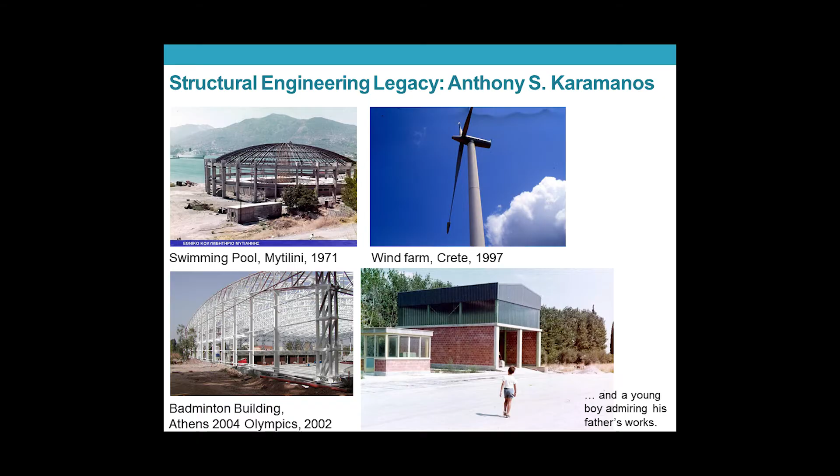I attended a French school, and that was important for me, not only to learn the French language, but also to get acquainted with the French culture. And that is very important for my future steps and my general background.

After a few years, the first one became prime minister, the other one became president of the republic. But apart from this milestone, I think it's important for my professional career because it gave me a lot of confidence in my future steps. So I entered the university, the National Technical University of Athens, and graduated in 1989. And after that, it was the big step to go to the United States for my graduate studies.

So Austin, Texas, was the university that I chose. It was a very exciting time for the offshore industry. And being in Texas, there are many chances that you get something in your graduate studies related to the offshore industry. The offshore industry at that time wanted to expand to deep water applications, and one of the problems was the integrity, the structural integrity of pipelines to be installed in depths that exceeded 1,500 meters.

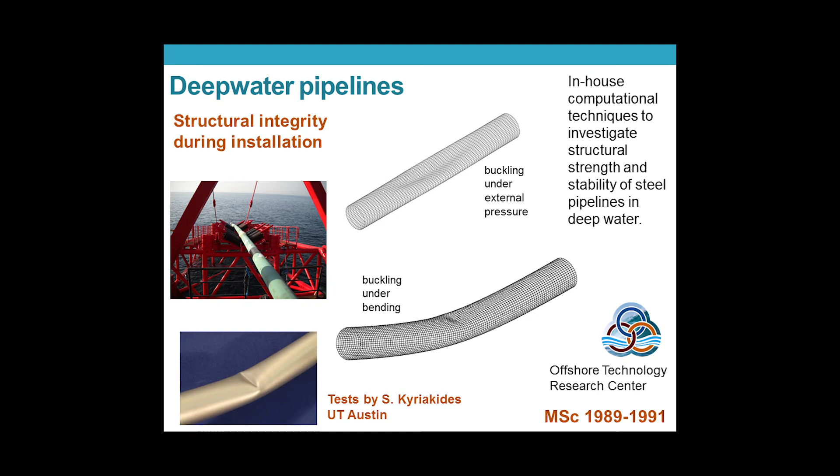So I was sponsored by the Offshore Technology Research Center, and the purpose was to develop numerical tools to understand the behavior of those tubulars, of those pipe components, under different types of loading - external pressure, bending, and buckling. Structural instability was our major concern. And we also had to compare and complement with a test program performed at our university at that time, tests by Professor Kyriakides.

Just a bit of background to understand why this was an exciting time. There were plans for expanding hydrocarbon exploitation in deep water, not only in the Gulf of Mexico, but also in other parts of the world like Brazil, Western Australia, West Africa, Southeast Asia. And there was also a great need to transport oil and gas resources from production locations to countries of highest consumption, for example, Africa to Europe.

There were many projects in the 80s and in the 90s. I just want to mention two of them which are very important in my opinion. First, the Trans-Mediterranean pipeline connecting Algeria to Italy through Sicily. The water depth was 600 meters maximum, and it was a pioneering project because at that time it was the deepest offshore pipeline in 1983 when constructed.

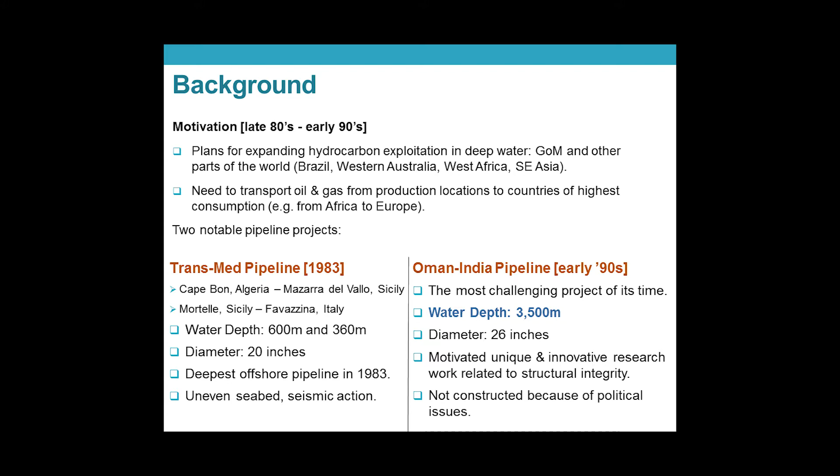And the other project is a milestone, the Oman-India pipeline that has been designed in the early 90s. It was the most challenging project of its time, probably of all times. Water depth 3,500 meters and the diameter 26 inches, and that motivated unique, innovative research related to structural integrity. Unfortunately, for political reasons, this pipeline has not been performed, but the legacy is still here in the pipeline community.

This is a sketch that shows schematically how we install pipelines in deep water. There is a barge, and the pipeline is there in pieces coming from onshore, and then these pieces are connected one to the other, and then by advancing the barge and launching the pipe, that's how the pipeline is installed. The most critical part for structural integrity is the sag bend area, where there is bending.

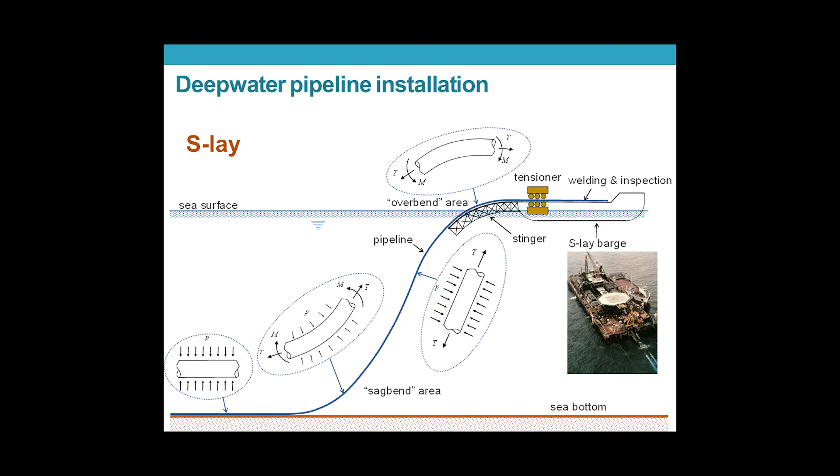So it is like a spaghetti, of course, but locally there is a lot of bending. So you take a pipe and you bend it, and you don't want that to fail. At the same time, you have a lot of external pressure because you are in deep water, and that combination can be very bad for your pipe.

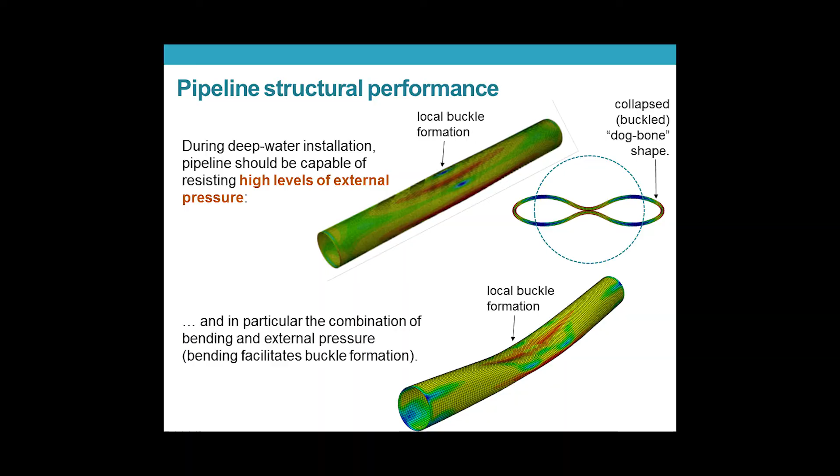So this is what happens to a pipe when you apply external pressure. Instead of having a circular pipe, when it buckles, it becomes flat, and you don't really want this to happen. And then this phenomenon is accentuated when you add bending. Of course, now with the tools we have and all the knowledge 30 years later, we can understand the phenomenon quite well. But at that time, it was really challenging, so that is the reason why I mentioned those times to be very exciting.

After my master's was my PhD, again on offshore structures, but not on pipelines. It was similar, it was offshore structures made of tubulars. So we investigated tubular members that were not just tubes, but they had stiffeners. And those stiffeners could be internal or external and have been used in offshore platforms in the 80s.

This is the Cognac platform. You see those stiffened tubes to resist external pressure. But then they wanted to go to oil fields that reach approximately 1 kilometer of water depth. So the question is whether this is safe and the tools we have are adequate.

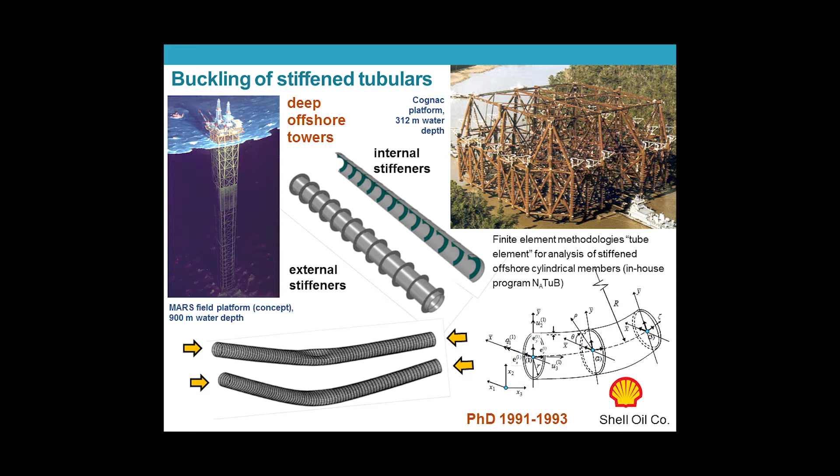So we developed tools, a numerical finite element methodology to deal with this problem, and the sponsorship came directly from Shell, that was responsible for all those platforms. Shell at the time was a pioneer in those deep water platforms.

Just to give you a background, these are impressive structures. The size of those, this is the biggest one, the fixed platform that has been constructed up to that time, is the Bullwinkle platform, gets several awards, for example, the ASCE Outstanding Civil Engineering Achievement Award, and it is as big as the Sears Tower in Chicago. It's an impressive structure.

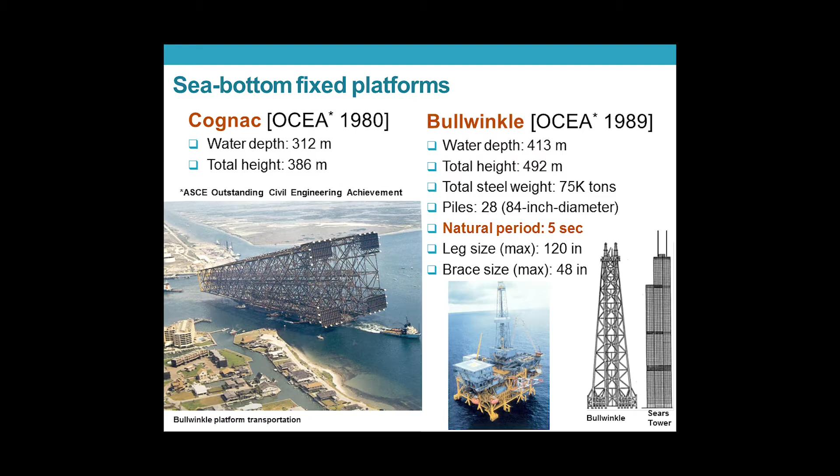The most important feature here, apart from all those impressive things, is the natural period, which is 5 seconds, the period that is vibrating freely, for those of you that are not very familiar with dynamics. And if you go deeper than that, then these 5 seconds become, say, 7 or 10 or 12, and that may coincide with the frequency, with the period of the wave excitation.

So if you increase that number, you get resonance with waves, and it's very difficult to stabilize your structure. So the solution to that problem, if you want to go deeper, is the compliant towers, which was a very promising concept in the late 80s and early 90s for depths of 500 to 1000 meters. And there was always a debate between those towers and the floaters. In the late 90s, because they wanted to go more than 1000 meters, of course, the floaters dominated the market, but there were several compliant towers that have been constructed.

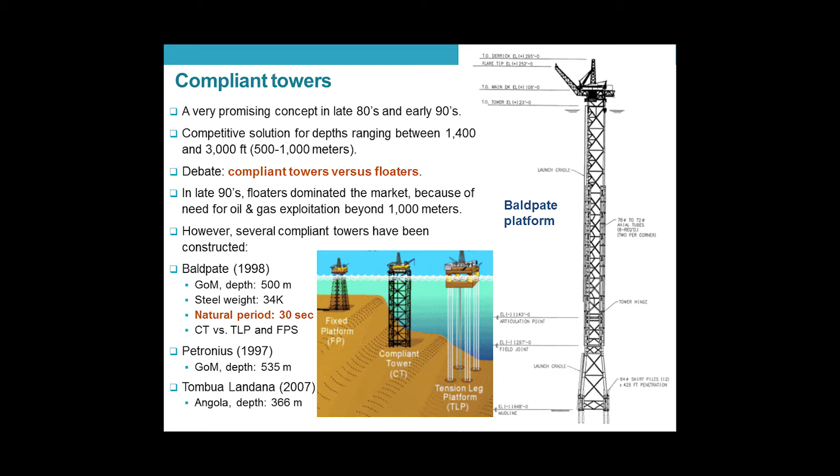The Baldpate, the Petronius, and also another one most recently in Angola. It is something in between the fixed platforms that we discussed and the floating platforms, and has the advantage of being very flexible, so that you have about 30 seconds of natural period, so you avoid resonance with waves, but from the other side of the spectrum.

Our work was mainly to investigate the tubular members in the Mars platform for the Mars field, at a depth of 900 meters. It was an impressive project, and we took part in that part of the project. We were very happy to be part of that team. It's an impressive structure, designed completely, but finally it was decided to go for the TLP, the tension leg platform, so it was never constructed.

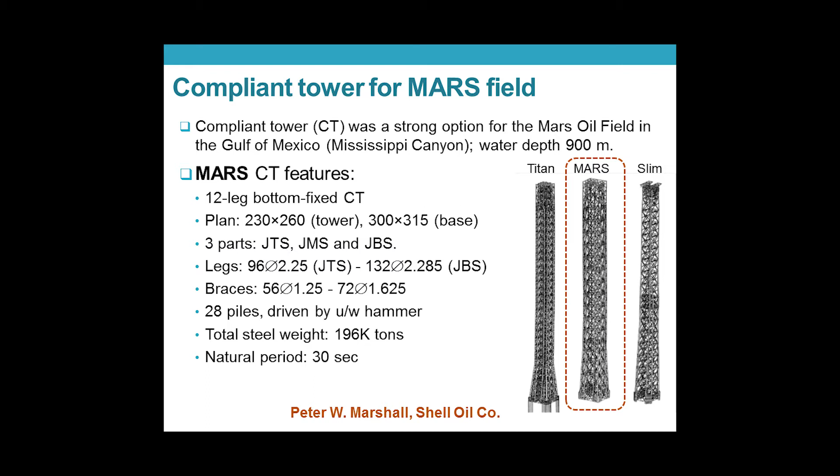I also had the chance to meet Peter Marshall and work with him. He was the supervisor from the Shell team, and was one of the people behind all those impressive structural systems. I think he was one of the greatest structural engineers of his time.

So I became a Longhorn, graduated, and I'd like to acknowledge the contribution of my professor, John Tassoulas. John was always next to me. He was very supportive, a person dedicated to education and research, and his dedication to quality research, and also his attention to details, were a very important feature for the quality of my work.

Thank you, John. So after spending 2 years in the military as a sailor and then a petty officer, I went to Delft for my postdoc in the Steel Structures Group as a research fellow.

That's where I started realizing that the tubular geometry is not so simple. It's simple if you consider each member by itself, but if you combine the tubes together to form a structure, then this connection is not so simple, because it's the intersection of two cylinders in space, and that line is quite complicated.

One of the features those connections have is that the local stresses are very, very high, much higher than anywhere else. So if you have repeated loading, mainly because of waves and wind, that might start cracking — a phenomenon called fatigue. You see a fatigue crack here, and if that develops, then you have a problem in your structure.

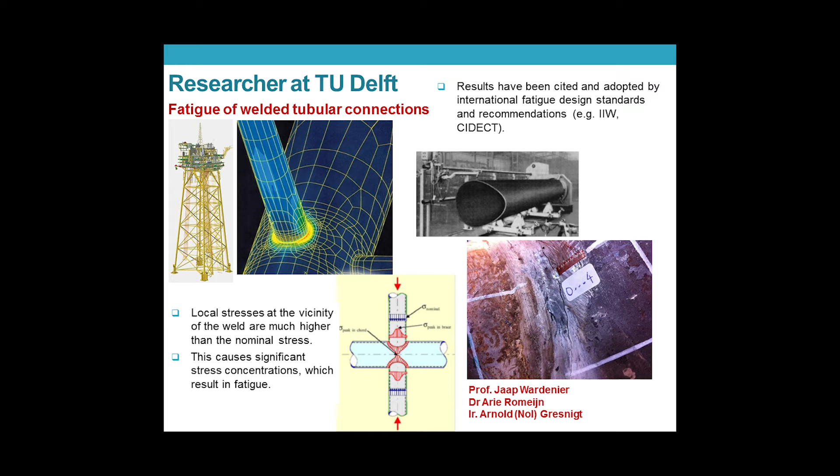But it was really an interesting topic, and I really want to thank Professor Wardenier for giving me the opportunity to work on this topic, which was a very important step in my career.

It was also a great chance in Delft to meet Nol Gresnigt, who is here. He didn't participate in that particular project, but after that we did a lot of projects together, so it was really an important meeting. After that, I decided to go back to my country.

It was '96, and the country was expanding. There was a lot of infrastructure work. So I decided to go to Thessaloniki, where I worked as a structural engineer on Egnatia Odos, a big highway project. I must say I had a very good time in Thessaloniki.

I didn't do much with tubulars. The only tubular work was on those very high piers that supported the bridge deck. Those piers were impressive — 65 meters, hollow, rectangular section, a 4x4 section, with a thickness of about 40 centimeters. I didn't do much of that work, but it was a great experience for me.

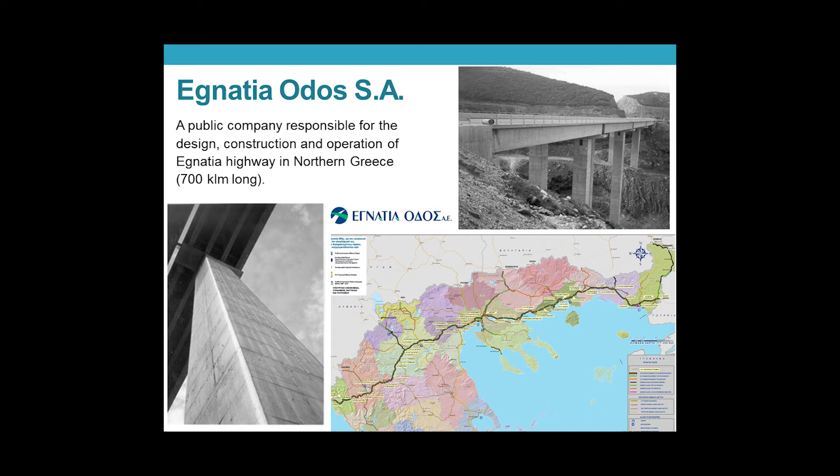And Thessaloniki is a great place to be, especially when you're young and don't have a family. A friend of mine insists that Thessaloniki is the best place in Greece for young people to retire.

But after that I was dedicated to education and academics, so I decided to follow an academic career. There was an opportunity in Volos in 1999 that I followed, and I believe that's the start of my academic career.

Volos is in the area of Thessaly, in the middle of the country, halfway between Athens and Thessaloniki. Thessaly is the birthplace of Achilles — if you see Troy with Brad Pitt, yes, it starts in Thessaly. Volos is also the place where Jason started his expedition with the Argonauts to get the Golden Fleece, so it's a place with a lot of history, well mentioned in Greek mythology.

I was teaching mechanical engineering and structural mechanics, and one of the things that are very important for structures in Greece is the seismic problem, the earthquake problem. There were many devastating earthquakes in Greece that caused a lot of trouble.

One of them is the Kalamata earthquake, but all of them caused a lot of damage and casualties. The Kalamata earthquake was famous because it really devastated the city. If you see the earthquake map of Europe, we are safe. But if you see Greece, you cannot be safe anywhere in Greece.

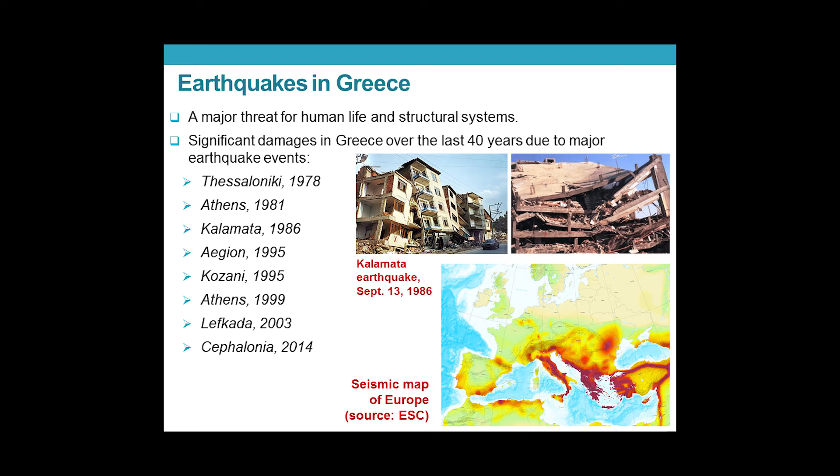It's a very important problem, and most of the research has been directed to civil infrastructure and buildings, and we are quite experienced in that in our country, not only in universities but also the practicing engineers. But being in mechanical engineering and having the background in pipes and tubes, my question was what may happen to an industrial facility or to energy infrastructure in general when the earthquake comes.

Just a few months after I was appointed, there was a very bad event in Turkey, the Kocaeli earthquake in 1999. Apart from 17,000 casualties, there was a lot of damage in the energy infrastructure, not only that refinery but also in other pipelines, water pipelines, gas pipelines, terminals. That was a milestone in seismic engineering because it triggered a lot of research, and it was good timing for me.

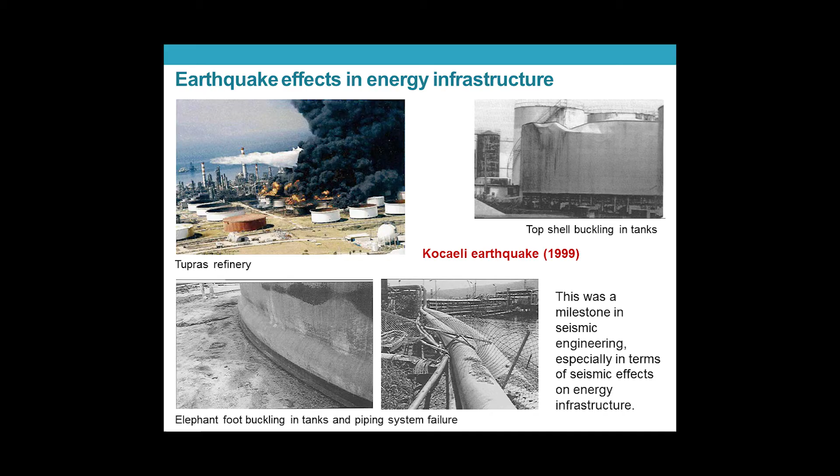The most interesting project that we participated in and actually coordinated was the INDUSE project, funded by the European Commission with the RFCS program. We had the honor to coordinate an international, multinational, multidisciplinary group of experts, and the main deliverable was the seismic design guidelines for tanks, pressure vessels, and piping. There was a lot of work, a lot of testing on critical piping components performed in many places by the partners.

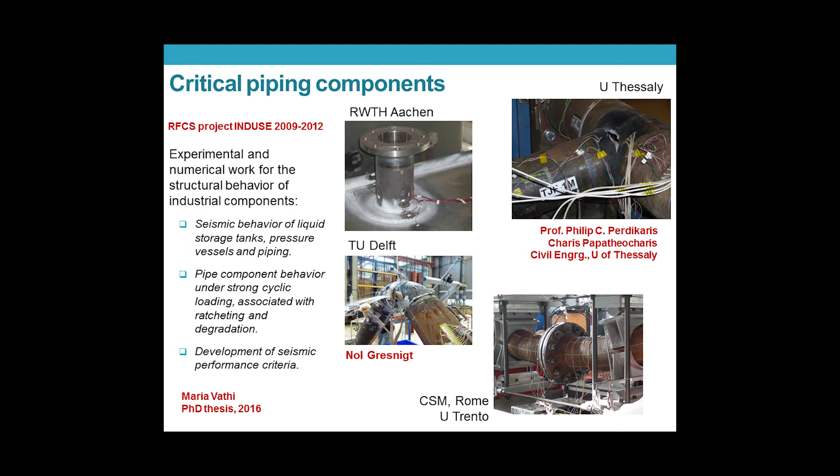Nol Gresnigt was responsible for the elbows. He did excellent work, and as you see in the next slide, it was very important for our numerical tools. Also in our university, we did work on junctions and branches, performed by Professor Philip Perdikaris and his team. I would like to thank him for all his contribution, not only this but all his contribution in our research. His dedication to laboratory experiment was very essential for the development of efficient numerical tools.

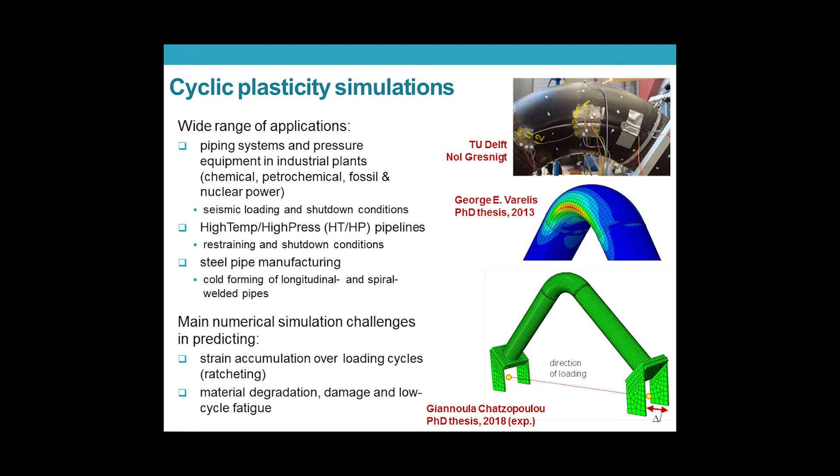In the numerical part, the topic we really tried to develop, and I believe we still are working on and will be working on in the future, is cyclic plasticity. It's a very difficult phenomenon associated with several strange, difficult-to-simulate and understand phenomena. We are based on experimental data available to us, and there was a PhD performed by George Varelis, who is in the audience, and there is another PhD going on these days, which is going to finish within the year. I think the combination between experiments and numerical work was very important for us to understand the physical phenomena.

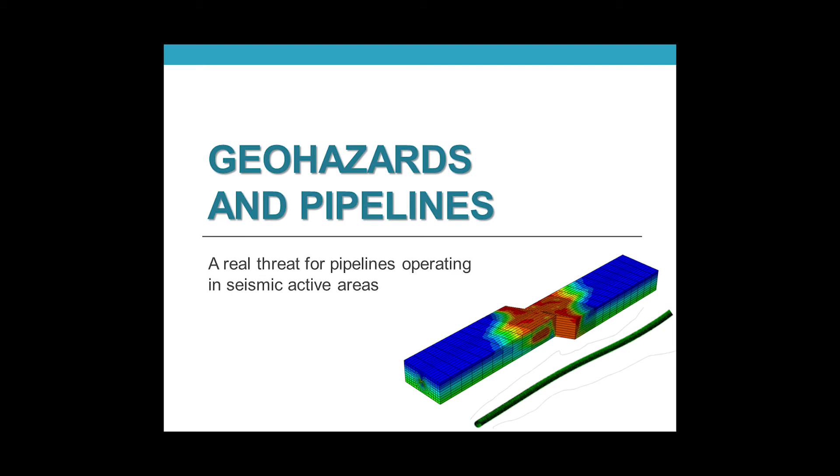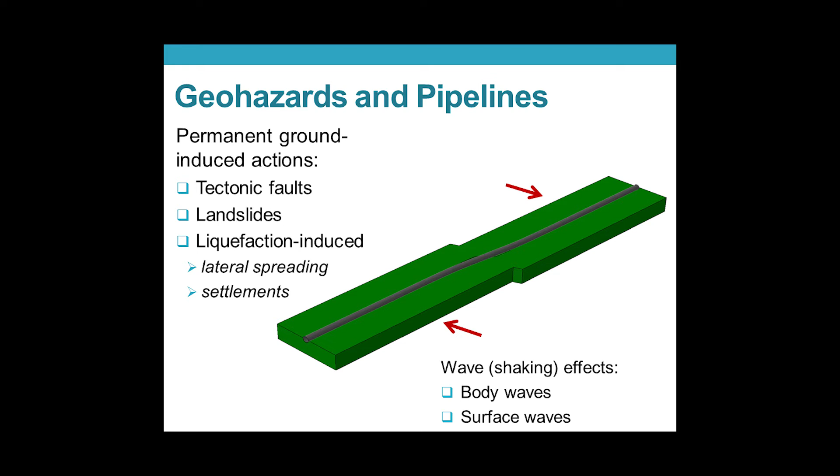Another topic that was very interesting and triggered our research interest was geohazards and pipelines. Pipelines are an elongated structural system, so there are two types of actions related to this pipeline in terms of geohazards: wave effects due to body waves or surface waves, and permanent ground deformations, mainly from faults, landslides, or liquefaction-induced loading. We are focusing on the permanent ones because that's much more critical for the pipeline. The wave effects are not so important unless there are special features outside the scope of this presentation.

So the problem can be stated as follows: you have two parts of the soil, and this is a discontinuity plane, and one part of the soil is moving with respect to the other. If you have a pipeline crossing that discontinuity, because of this movement the pipeline is deformed, and then the question is: is your pipeline safe? To do that, the first step is to calculate the forces induced by the soil on the pipe, which is what we call strain demand.

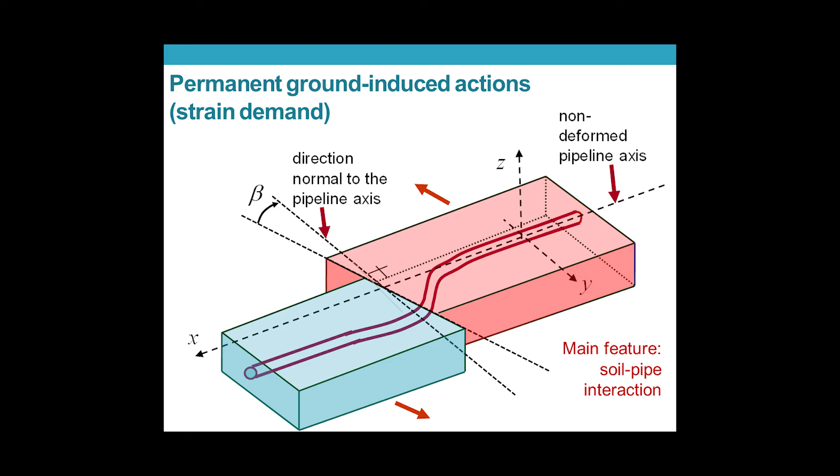The main feature here is the pipe-soil interaction. In that strain demand area, we had a project funded by the European Commission, and we again coordinated a multidisciplinary, multinational group of experts, with the target to develop design guidelines for steel pipelines in geohazard areas under permanent ground deformation.

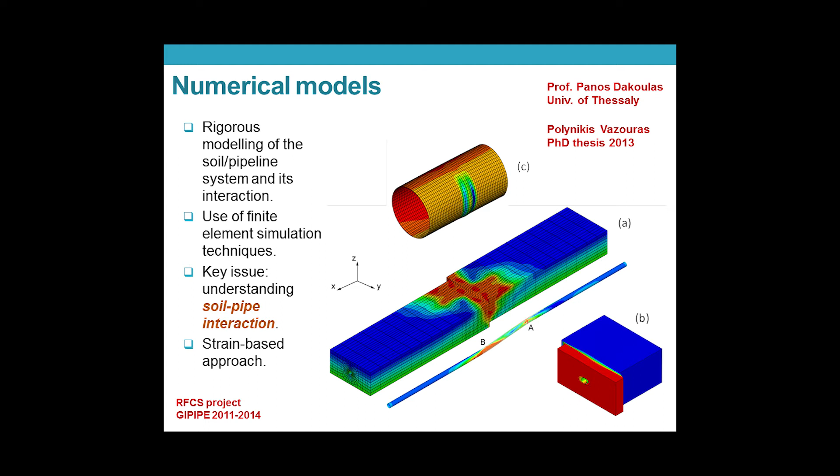The most important contribution was the numerical models that we developed. These models were developed in cooperation with my colleague Panos Dakoulas, a geotechnical engineer, and we also had a good student, Polynikis, who is now working in Germany as a finite element expert. These models were the first to address the problem in a rigorous manner, so we managed to calculate with accuracy the actions from the ground to the pipe.

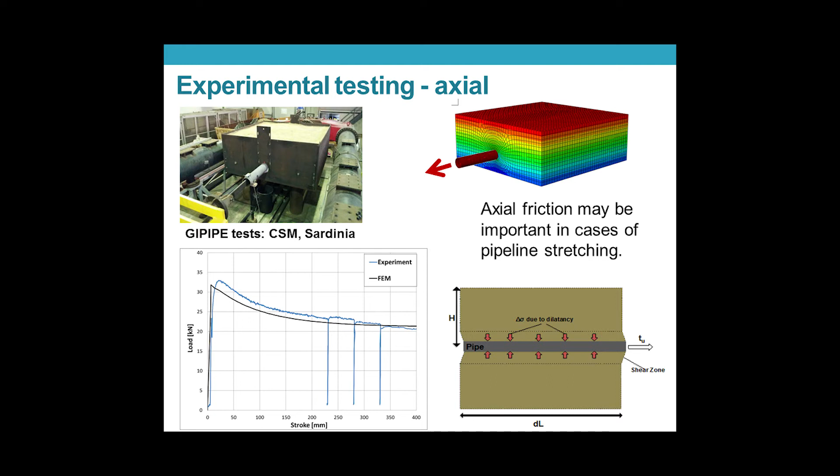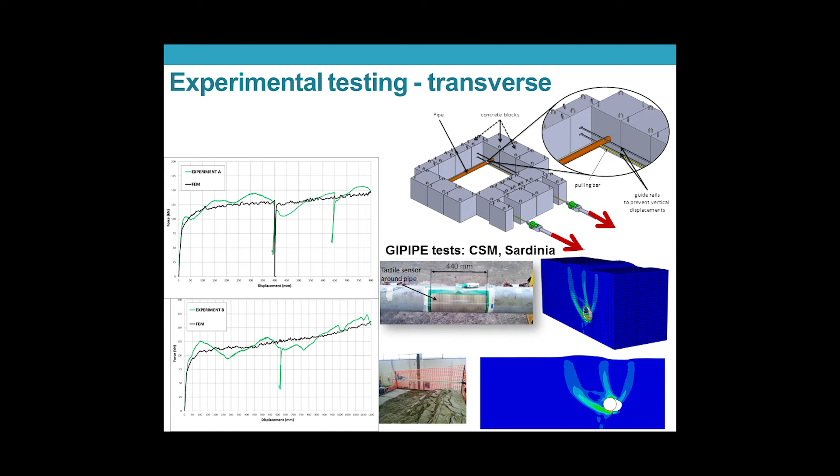That project, the GIPIPE project, gave us the chance to cooperate with the people at CSM, Centro Sviluppo Materiali. They had excellent facilities in Sardinia, and we conducted physical testing to calibrate those numerical models. We did testing with the interaction in the axial direction and the transverse direction, with very good comparison between our analysis and the test results, those two curves. We also did the ultimate test, a big test, outdoor, 25 meters long, with 3 boxes, and we can simulate the landslide or fault action by pulling the middle box.

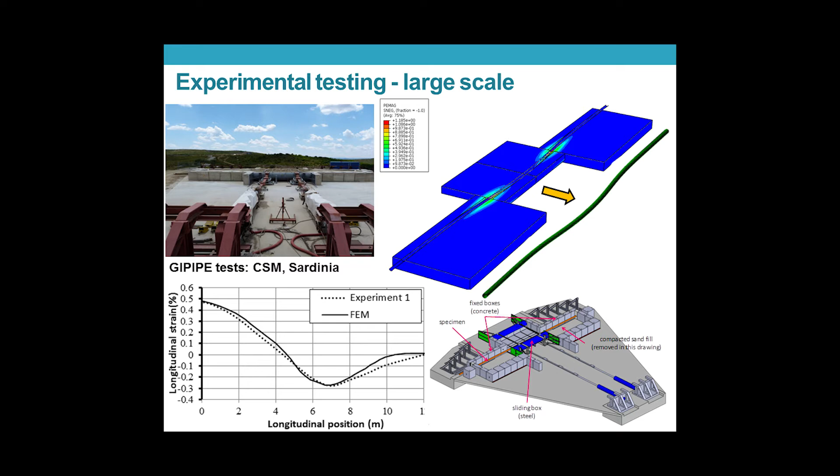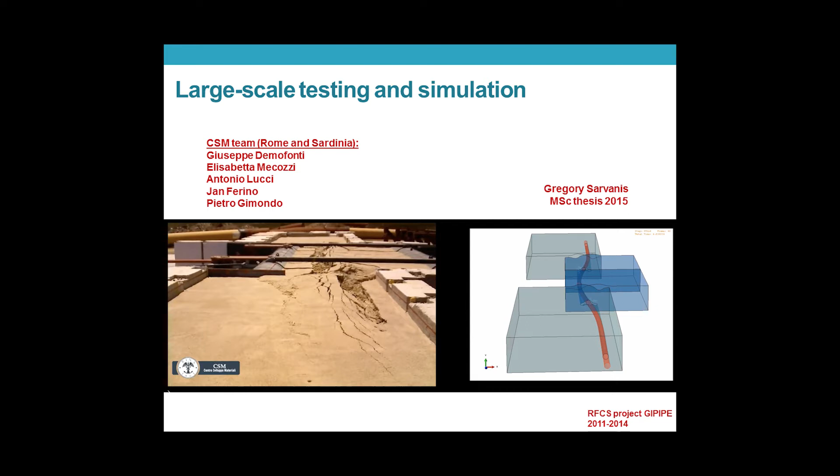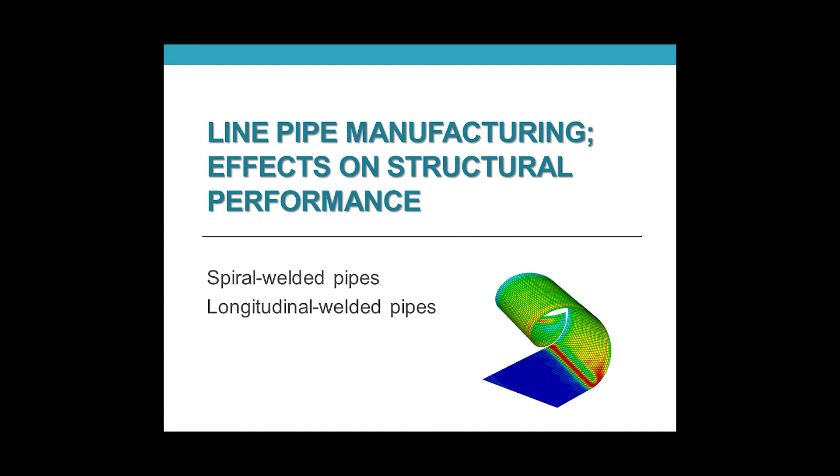The other topic I'll be talking to you is line pipe manufacturing, so it's the manufacturing of a piece of pipe. This is mainly a mechanical engineering topic, but it's important for structural engineers, because as a friend used to say, a pipe doesn't come from heaven, somebody has to make it. So the method that you choose to fabricate a pipe is very important in order to measure the final properties of your pipe, and that affects also your structural performance.

One way to manufacture pipes is the spiral method. You start with a steel sheet that is in a coil, and then you de-coil that, you make it flat, and then by bending that in an angle, and by continuous process, you form that pipe.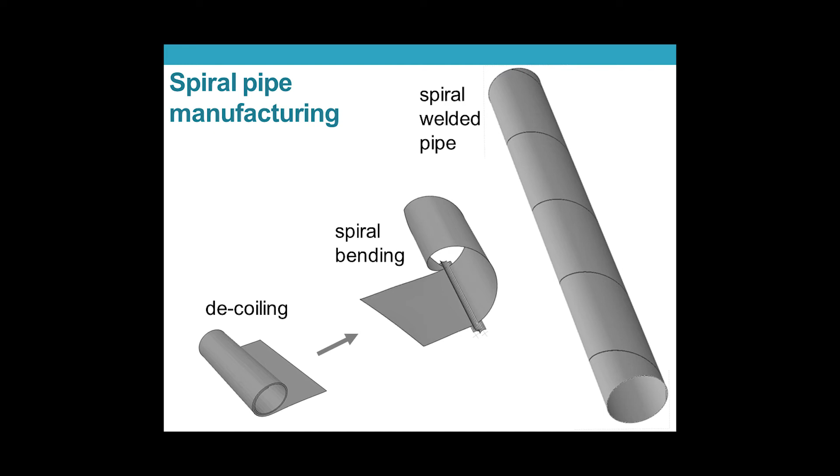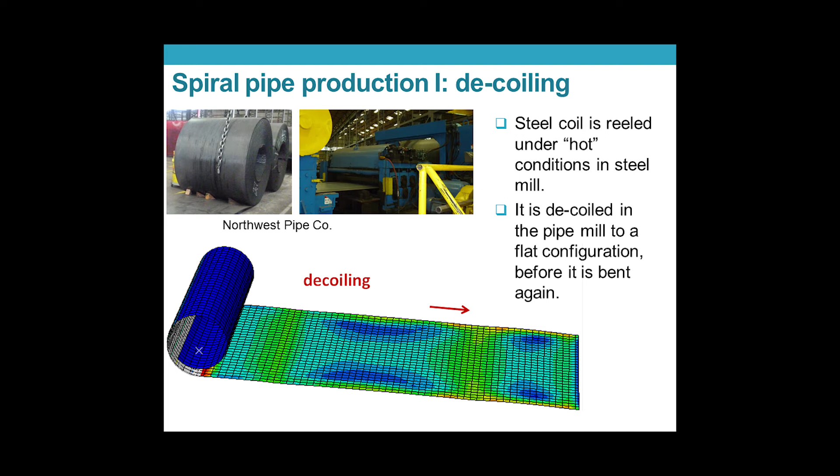We have quite some interaction with several manufacturers, and we are able to get all the information necessary in order to model that process. This is the de-coiling, also the spiral bending.

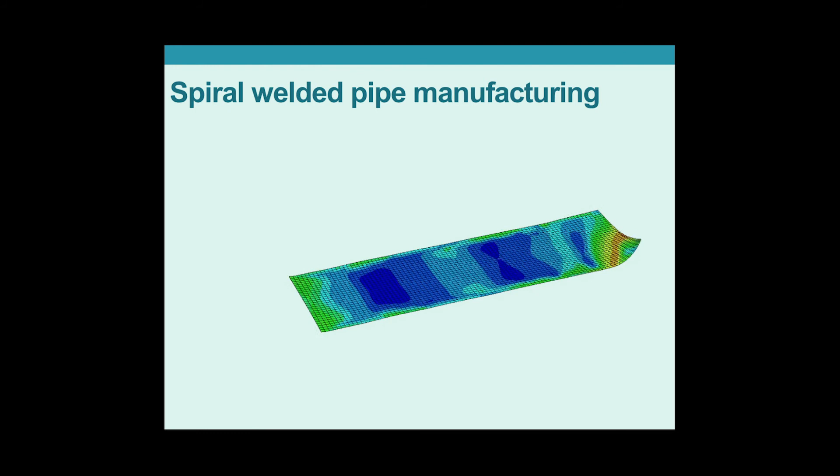If you have this model, and this is a nice video that my students have prepared, you have a very powerful tool, so that starting from the properties of your coil as received from the steel manufacturer, the pipe manufacturer can predict the properties of the pipe. That is a powerful tool that can be used for optimizing the manufacturing process.

We use that. This is an example where we compare our predictions with some data that have been given to us. We're able to predict also anisotropy, because if you take a piece of pipe in one direction and test it, and another piece of pipe in another direction and test it, you get different properties. That's because of the manufacturing process mainly.

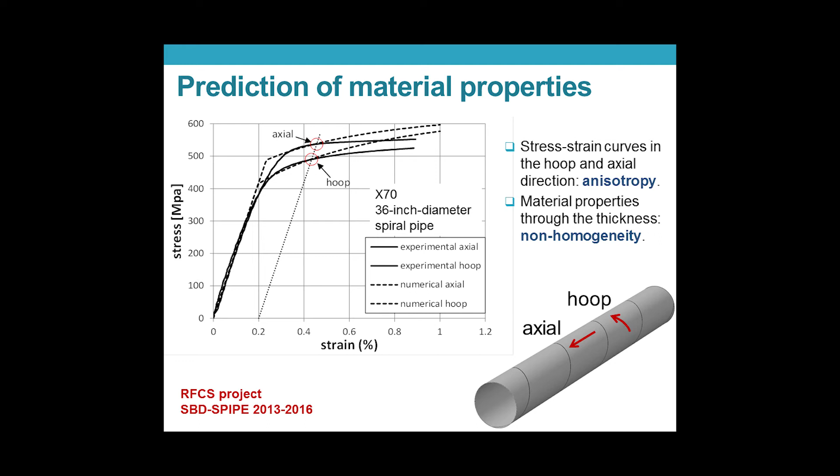Also, if you use that information, you are able to predict the mechanical behavior of those pipes under extreme loading conditions. This is a test that has been successfully simulated. The test has been performed by Salzgitter Mannesmann.

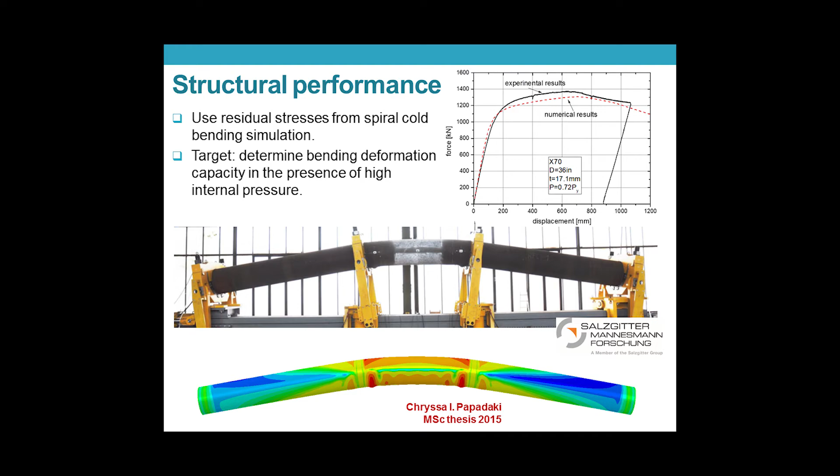But spiral is not the only method to manufacture pipes. We can manufacture pipes starting from a plate, and then by using some dies, you can make that round, then weld it and make it round. These are two methods for longitudinally welded pipes, the UOE and the JCO. UOE is very popular in the University of Edinburgh, although it doesn't mean University of Edinburgh. UOE means the U, the O, and the expansion, but it's just a coincidence.

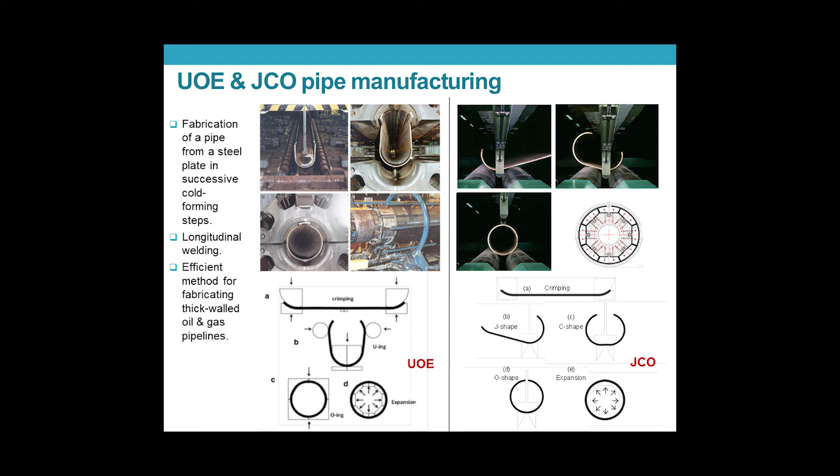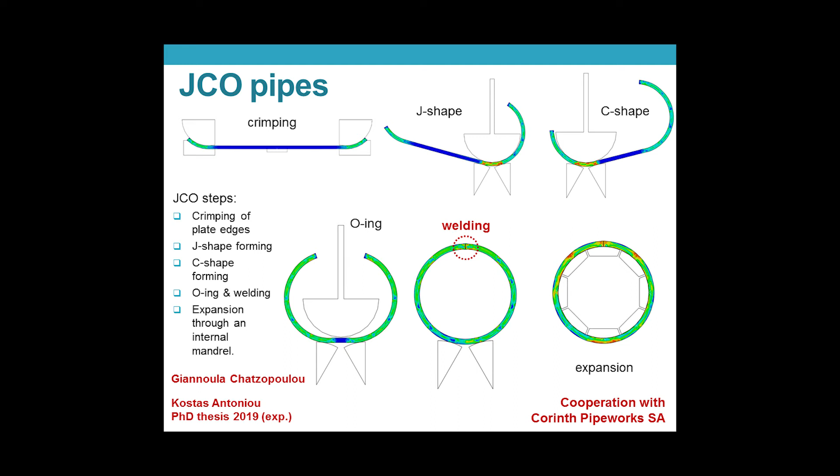We have also contact with pipe manufacturers for simulating that, and this is a simulation of the JCO pipe. There is a current work that finished a few months ago with students working on it. There is a PhD pending, but also there is a good cooperation with Corinth Pipeworks, a major pipe producer in Europe. I'll show you this process in finite element simulation in a nice video.

First, you crimp the edges. Then there is a punch that is punching your plate in several places. Gradually you make it round, but first you make it take the shape of the letter J. Then you go on the other side and continue punching.

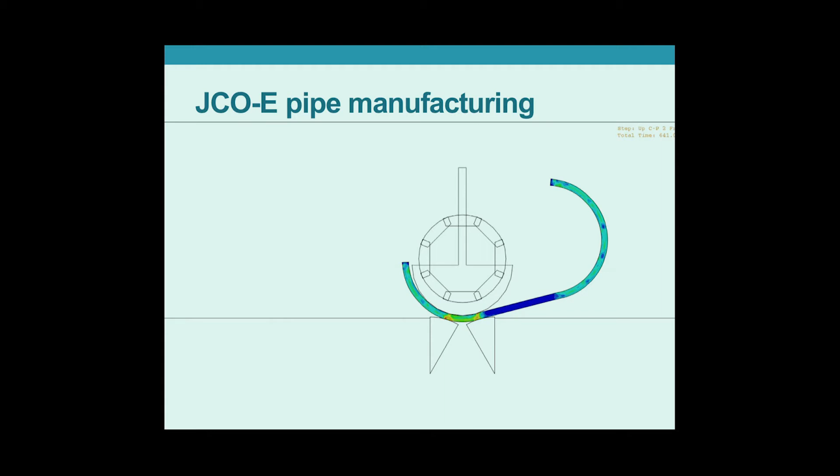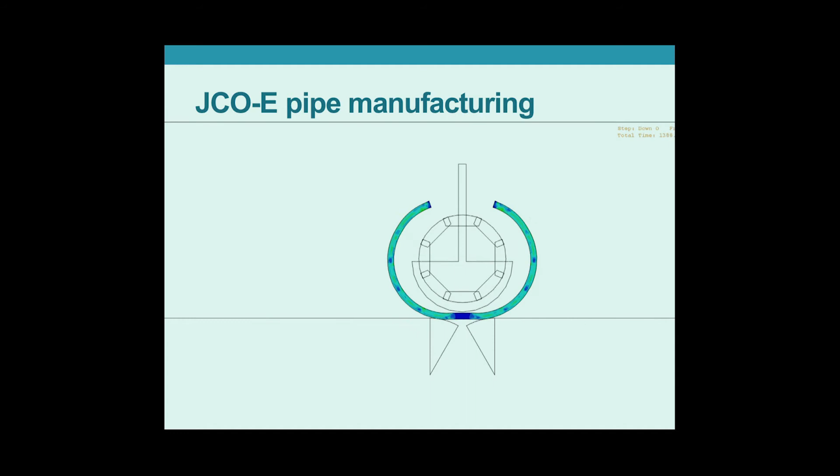Takes a little bit of time. Continuing that, you make it look like a C, so that's a second letter. Then there is one in the middle to make it O, and then the punch goes away, there is a welding, and then there is expansion. You need to expand that to control the shape and avoid any out of roundness that is very difficult to be welded afterwards.

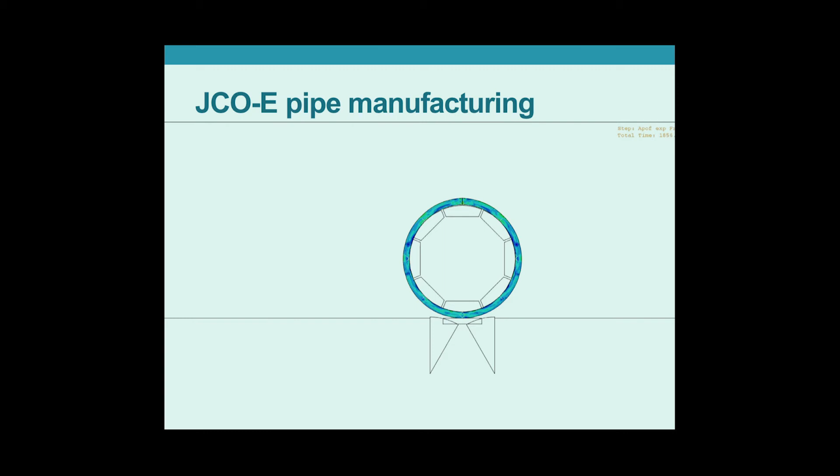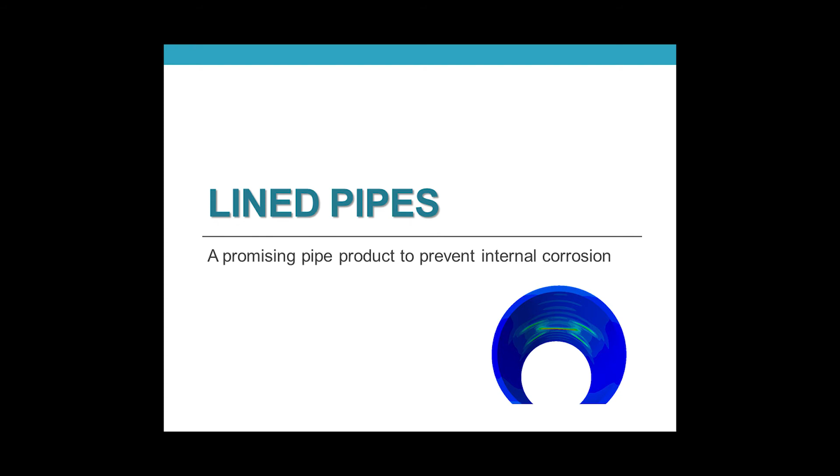Another project that I will present to you is called lined pipes. These are pipes that are actually a very promising product to resist internal corrosion. This is actually a double wall pipe consisting of a corrosion-resistant thin wall liner fitted inside the carbon steel thick wall outer pipe. So this is the carbon steel and the stainless steel.

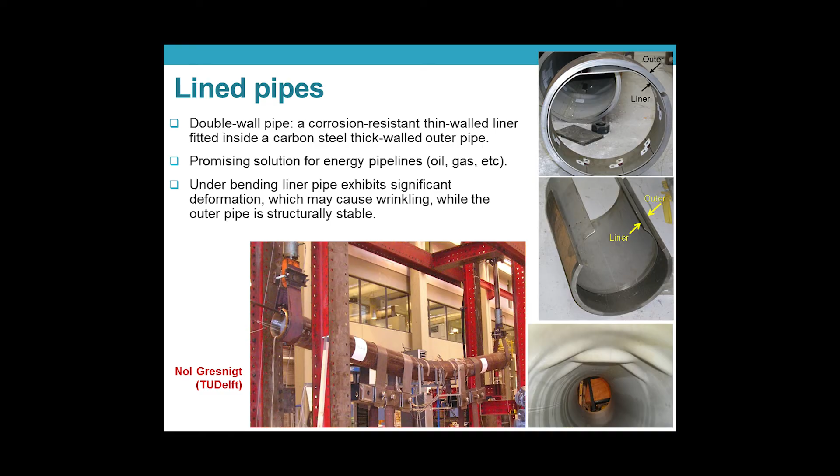If you bend it altogether, you see nothing from the outside because it's quite thick, so nothing really happens. But the thin wall, which is inside, is also bent, and then you can have those buckles under confined conditions. It's a formidable buckling problem, a shell buckling problem.

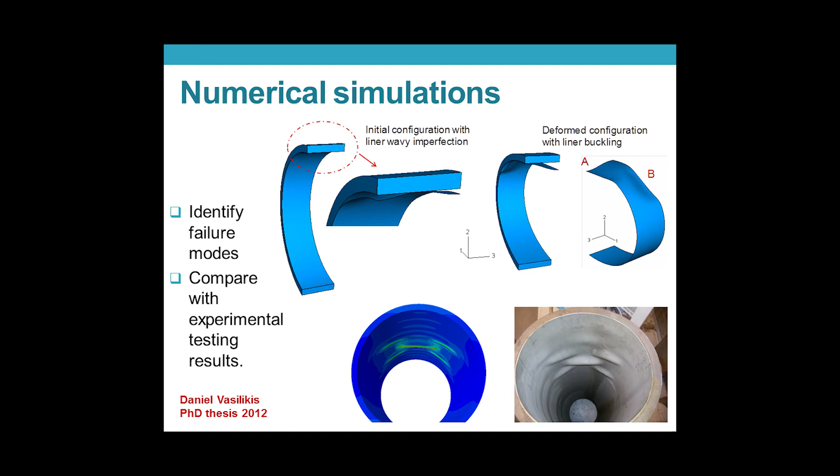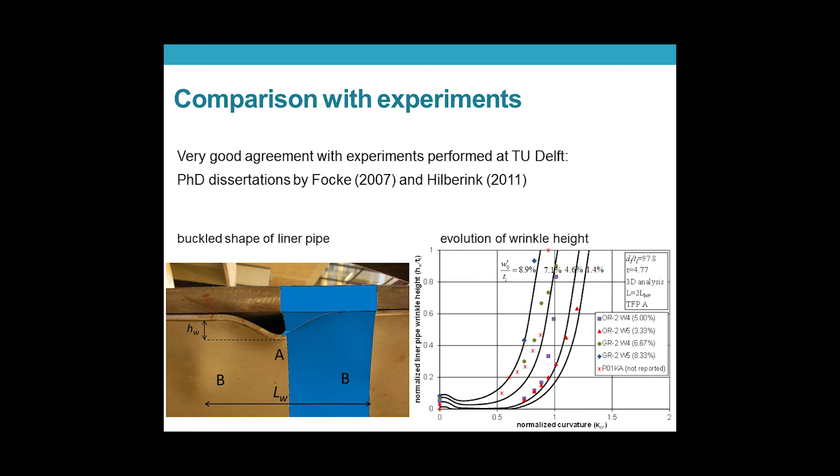We developed some numerical tools to investigate that, and our work was quite pioneering because we managed to show all the buckling bifurcations that happen there, and we got very good comparison with experiments, not only in shape, but also in the length of the wavelength and also the evolution of the wrinkle height.

Another topic we are very interested in is structural stability. This is probably more theoretical than the other ones, but it's a continuation of work I did in Texas, and there have been two PhDs on it so far. This is buckling of elastic cylindrical shells, and one of the major things we investigated here was the transverse isotropy of those tubes, which you can consider as being fibers. We then investigated the buckling shapes and post-buckling behavior of those cylinders.

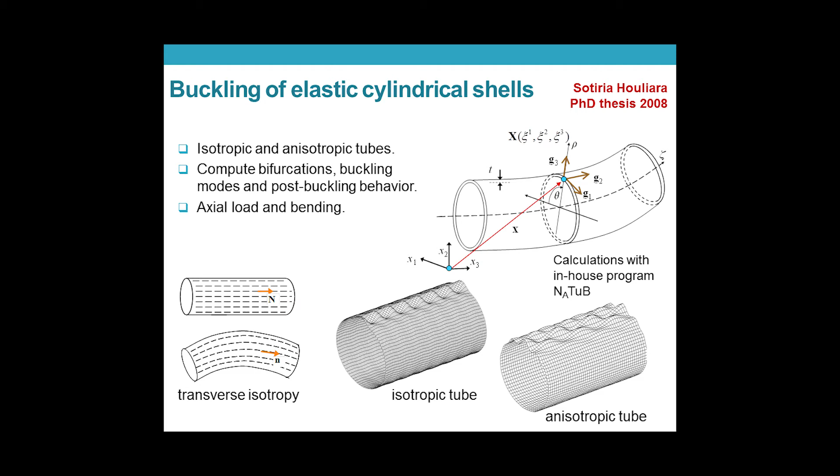We extended this topic with our computational techniques to thick-walled tubes, and investigated issues like buckle localization and secondary bifurcations in the plastic range. We compared very well with tests by Professor Kyriakides in Texas.

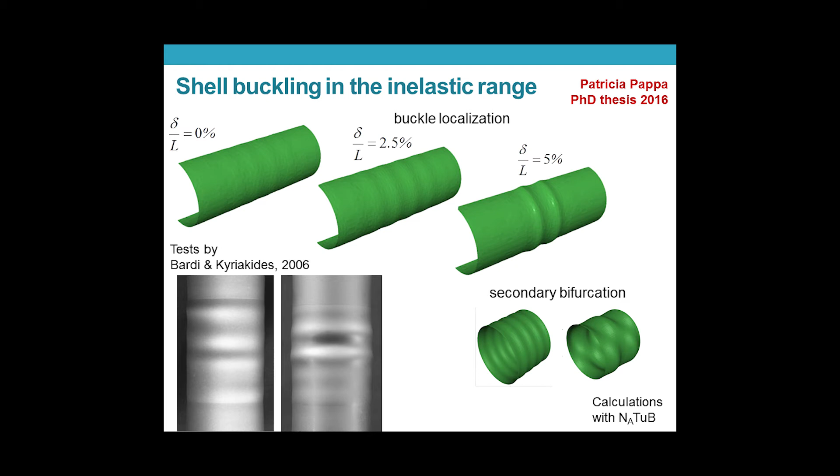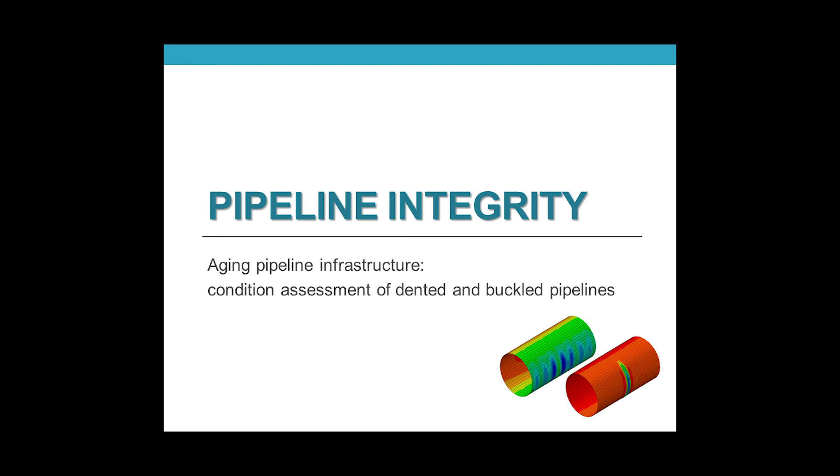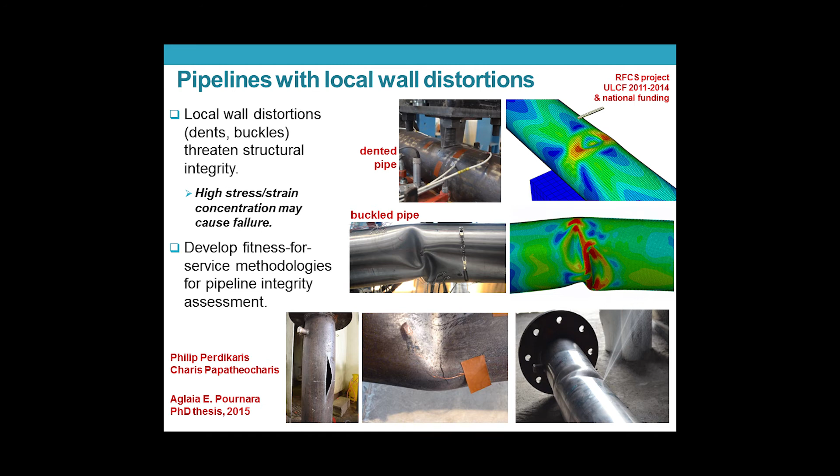A topic that has a lot of interest in many countries is what I call pipeline integrity, because it relates to aging pipeline infrastructure. In that topic, we investigated the integrity of existing pipelines that have local wall distortions, either from dents or from buckles. There is no loss of containment immediately, because the steel material is quite ductile and the containment can be sustained. However, if you operate that, the operational load gradually can cause fatigue in those locations because of strain concentration, and this is a threat to your pipeline.

So we conducted experiments in the lab together with Philip Perdikaris again, and there was a PhD on this. We got funding from Europe and also national funding, and we developed fitness-for-service methodologies in order to assess the structural integrity.

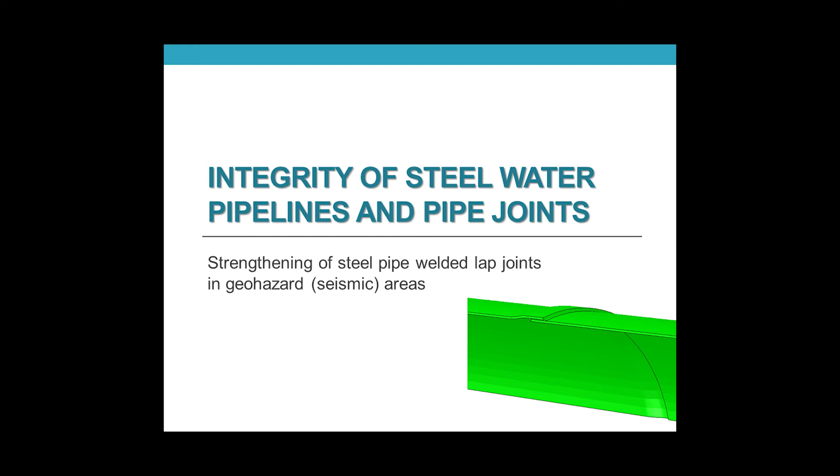An exciting topic I will present to you refers to water pipelines. These are pipelines that have some particularities, and it's work that started quite some time ago and is still continuing. It's very interesting, mainly related to the steel water pipeline community in the United States. My interaction with that community started in previous decades.

This is Bob and George. They're also here, and I'm very happy to have them here today. Very good friends, and we work together on a project I will present to you.

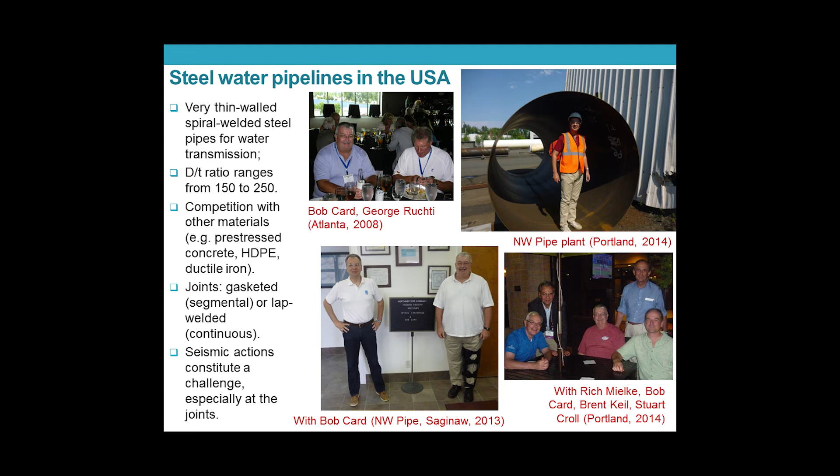I'm very proud that in 2013, in a seminar organized by Northwest Pipe, I was close to Bob. Bob is an expert in pipeline engineering, in water pipelines, and a well-respected engineer in the United States. These are Brent and Rich from Northwest Pipe, two people who wished to be here but couldn't — people we cooperate with on a project I will present to you.

My first interaction with this community was the ASCE Manual of Practice 119. It's a famous document because it is used by many practitioners and pipeline engineers in the United States. This document is based on the work of Professor Reynold Watkins from Utah State University. Professor Watkins is considered the Pope, or the Patriarch, of steel water pipelines in the United States.

Nowadays, we continue this cooperation with the steel water pipeline community in the United States on the strength of welded-lap joints. These are joints totally different from the ones we have in oil and gas, and they're very simple to construct — you just expand the end of your pipe, insert the other one, and make those two welds, either on the inside, the outside, or both.

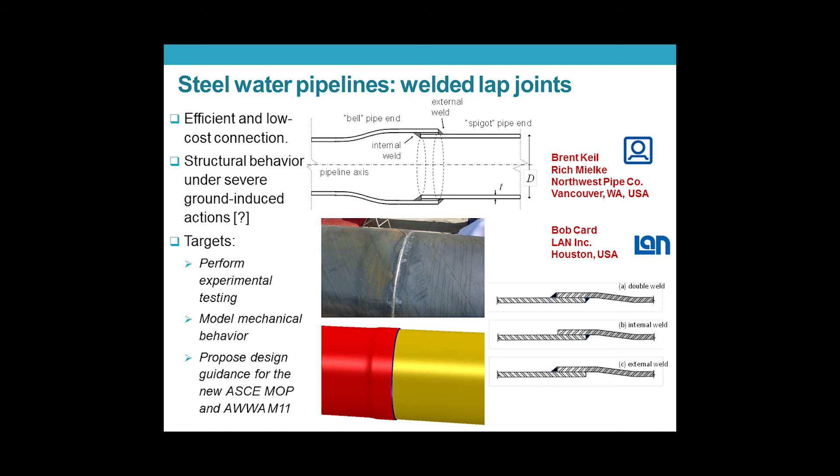This is work we conduct with Northwest Pipe, Brent Keil and Rich Mielke, with Bob also supporting the work with his experience. The major problem is that although those joints have been used for pressure design for a very long time and everybody was very happy, when it comes to geohazard conditions, where your pipe is really bent in extreme conditions, there was always a concern about how those joints behave. That is the major topic of our investigation.

So we developed numerical tools, based on experimental data — limited experimental data — in order to understand this behavior. Actually, there are locations that are really prone to buckling, so we need to be very careful about the integrity of the pipeline, especially at those locations.

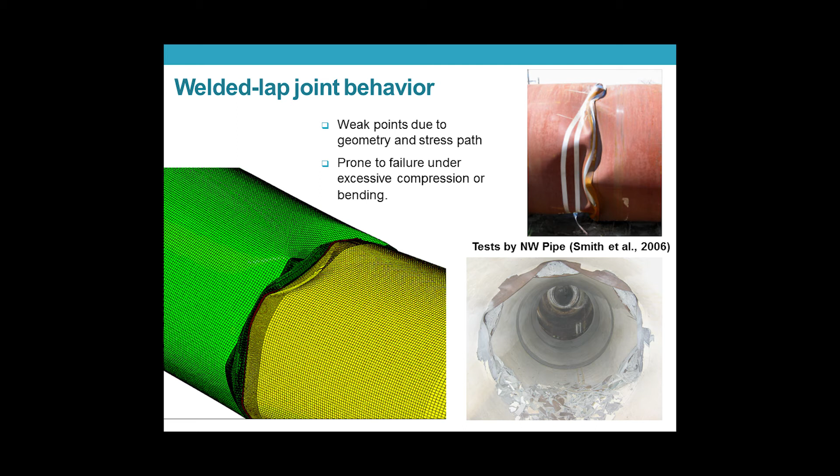There is another cooperation with HDR, a big consultant company in the United States, with David McPherson and John Plattsmier. They have developed a patent, a strengthening bell that goes outside your inner bell and strengthens it, and I am helping them verify it. This could be very useful for geohazard action.

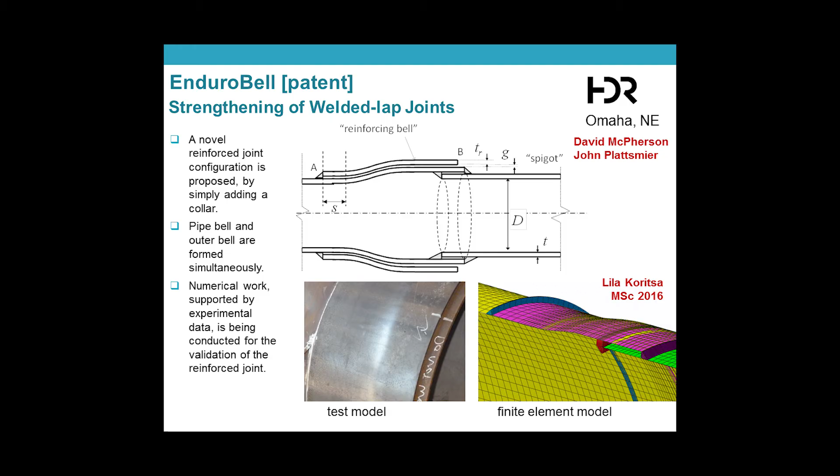The final project that I will present, which started a few years ago at my old university, concerns tubular structures, mainly for offshore wind energy production.

The first project, from the European Commission, refers to fixed offshore platforms, jackets for wind energy. This is not new; many people use these for supporting wind towers and turbines. However, the purpose of this project is to develop optimized solutions to support 10 megawatt wind turbines in water depths that are not really deep, up to 80 meters, so shallow water basically.

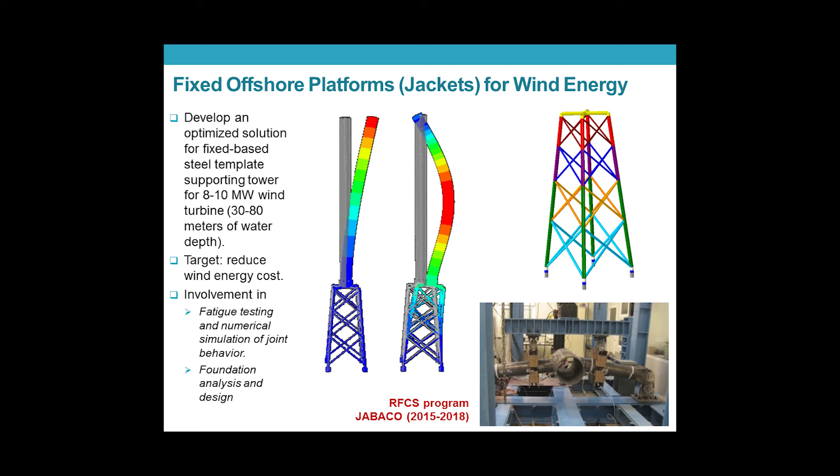The target is to optimize the structure to reduce cost, which is an important part of the total cost and will be very important for the competitiveness of wind energy. We are working on the connections, and also on the foundations.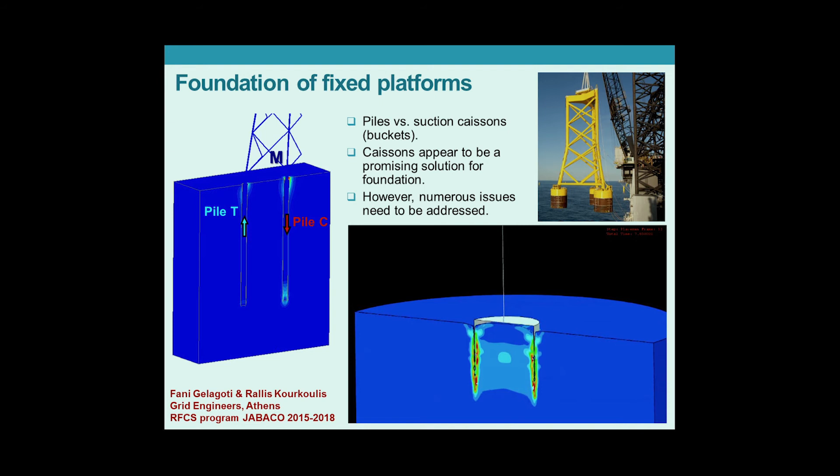We are doing mainly numerical work validating suction caisson foundations, which are rather new compared to the old pile-type foundation. Piles have been used for many years, but this type has some advantages. However, there are open issues to solve, mainly due to cyclic loading from waves and the interaction between the caisson surface and the soil. That will be important, and maybe by the end of the year we will have some new results.

I think the most interesting project is REFOS. It's also sponsored by the European Commission - a renewable energy floating offshore system that combines wind energy with wave energy. The cylinders have air compressed because of the waves, and this cyclic compression can generate wave energy. So it's the OWC concept, and that is under investigation.

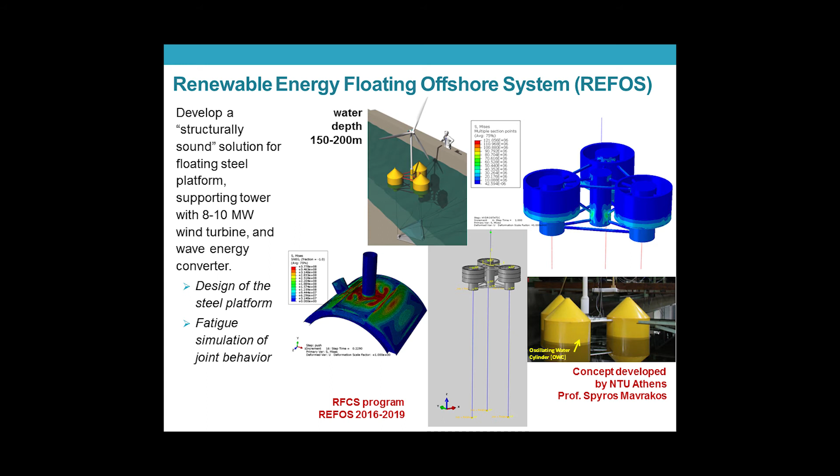It started about 1.5 years ago, and I believe by the end of the project we'll have an efficient solution for renewable energy production in water depths of about 150 to 200 meters. It's a concept developed by Athens and Professor Mavrakos, and we are happy with this cooperation.

From a theoretical point of view, we continue our work on fatigue of welded connections. One methodology we are trying to develop now is the cohesive element methodology. Of course, numerically, many people are working on this. Together with numerical methods, we are also developing key experimental testing to have a systematic procedure for calibrating the numerical models.

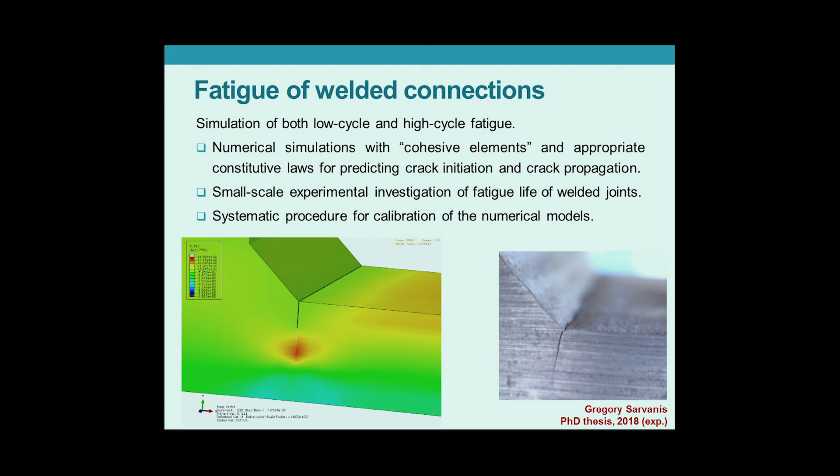So the final destination is Edinburgh. I've been here since August 2016, to be more precise September 2016, and it's a fascinating place. It takes only 4 hours to fly from Athens to Edinburgh, but it took me 49 years to come here - though I think the trip was quite interesting.

The destination is very interesting, and I'm very happy to be in a group of good people. We are 12 people related more or less to structural engineering, so there is a lot of engineering expertise in our department. There are also other people related to structural engineering in other departments, like mechanical engineering.

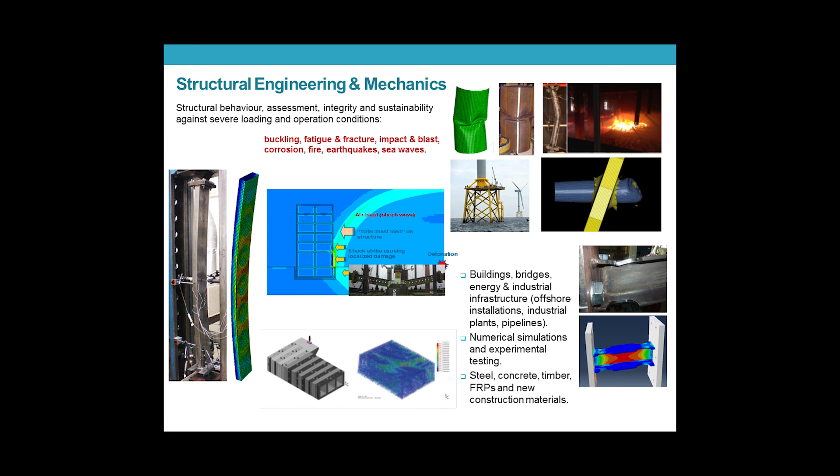We are working on several topics. Expertise ranges from buckling, fatigue, impact, corrosion, fire, earthquakes, sea waves - all the bad things that can happen to your structure. So we have quite a good range of applications, and there is a structures lab that helps us with experimental work, which we are also working on amending.

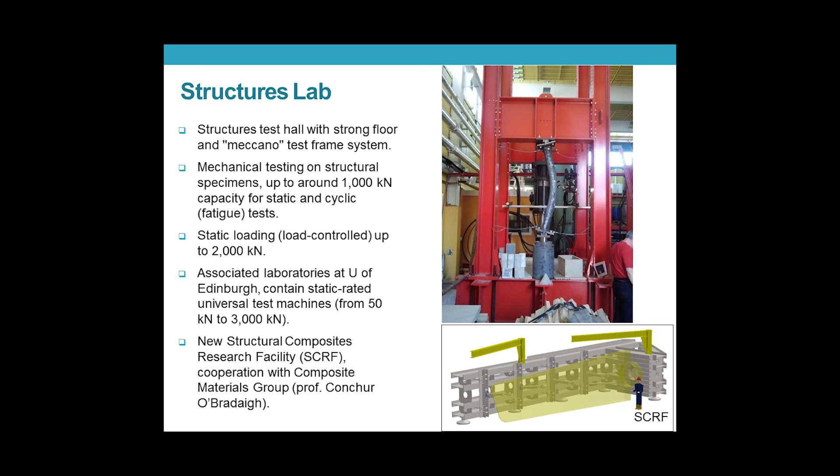We are also associated with several laboratories in the university to complement these capabilities. Recently we've been cooperating on the construction of a new structural composite research facility together with the Composite Materials Group and Professor Conchur O'Bradaigh. It's a facility that will allow us to test elongated structural components in fatigue very efficiently.

Just some slides for the research activities in structural engineering - the activities we plan, or have already started working on, in Edinburgh. We will definitely continue our work on cyclic loading, which is very important for the integrity of metal and steel structures.

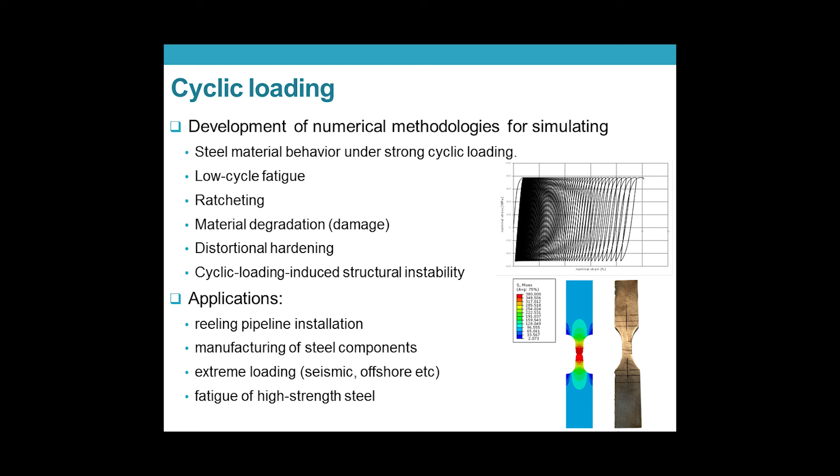We continue developing numerical models for simulating interesting phenomena: low cycle fatigue, ratcheting, material degradation, distortional hardening, etc. There are many industrial applications that are very important, not only to keep us close to the physical problem, but also to have funding opportunities.

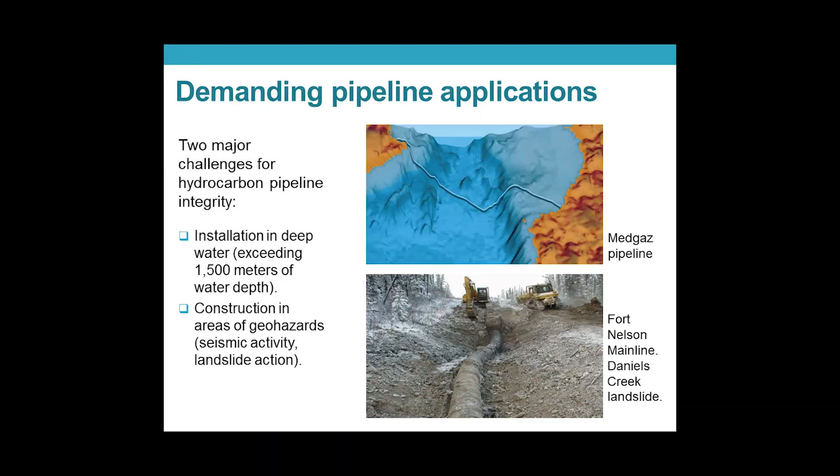We continue working on pipelines. Our work is driven mainly by two challenges: the installation of pipelines in deep water, at depths exceeding 1,500 meters, and the construction of pipelines in geohazard areas, mainly in regions of significant seismic activity.

There is a PhD that started a few months ago on lined pipes, a topic I presented before. We're particularly interested in another method of installing pipelines, the reeling method. In that method, you connect the pipes together onshore, forming this big spaghetti, and then spool it around a reel.

When you go offshore with that ship, you unspool and launch the pipe, and that's how you install it. In this PhD, we're investigating the mechanical behavior of lined pipes, double wall pipes, installed through that method. It's a formidable problem combining buckling under confined conditions, cyclic loading, and other related phenomena we discussed before.

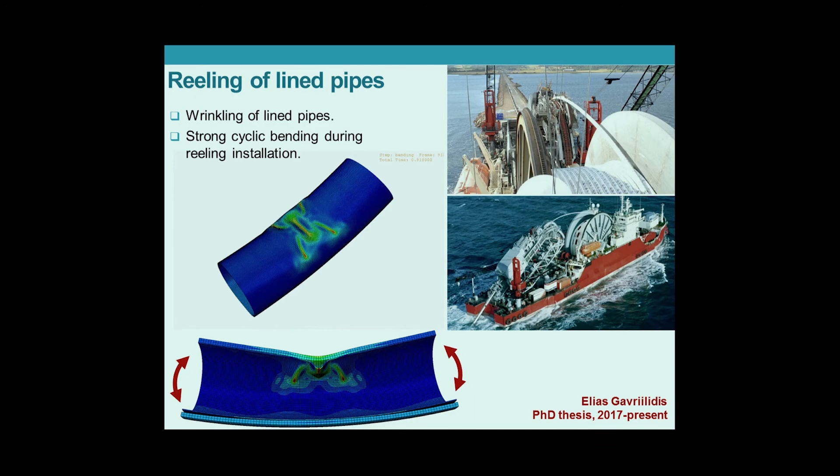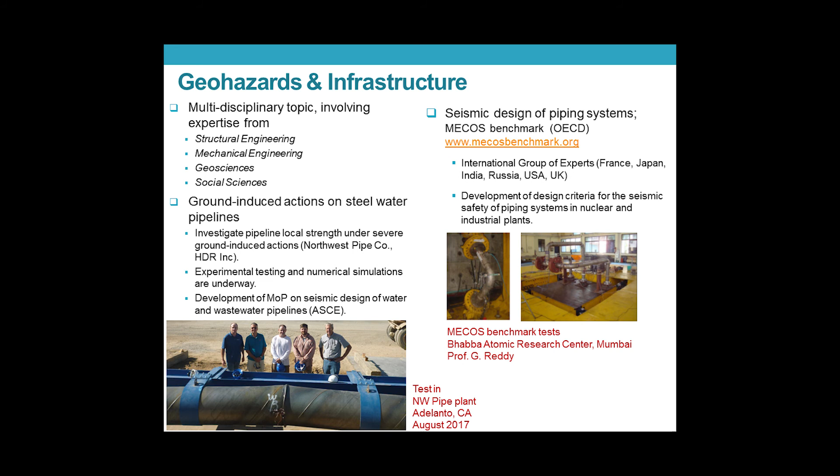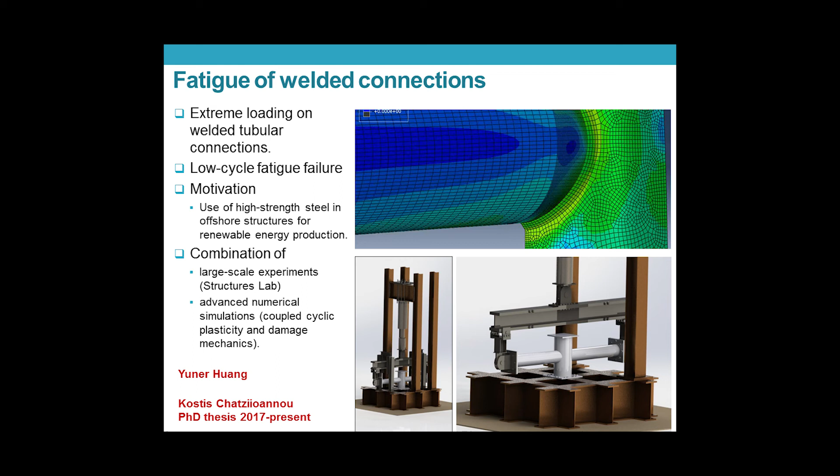The motivation is the use of high-strength steel in offshore structures for renewables, part of the general consideration these days for reducing cost in those structures and making renewable energy more competitive.

There is a PhD by Kostis Chatziioannou, who is here, supervised by Yuner Huang, and I'm very happy to be part of that team. It combines experimental work in our lab with advanced numerical tools.

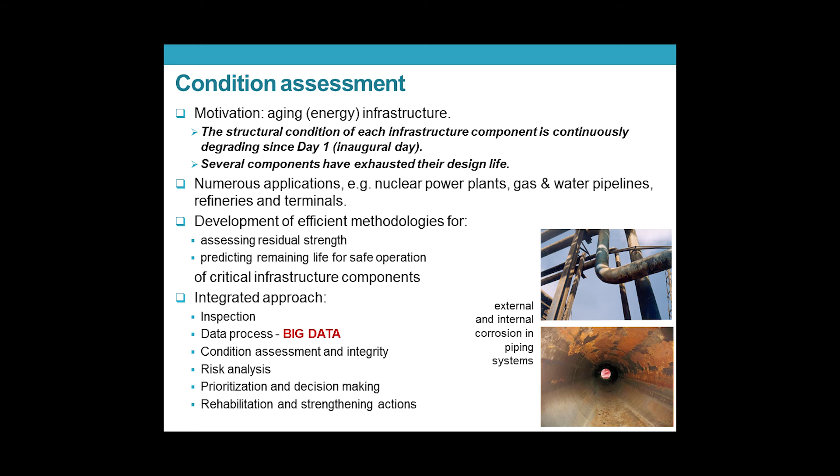To decide, you need accurate methodologies so you can assess residual strength and predict the remaining life for safe operation. We're following an integrated approach that starts from inspection and goes up to decision making and strengthening actions.

Of course, it's impossible for the University of Edinburgh to cover all that expertise efficiently, so we're talking to other experts and forming a strong team from other universities so we can really tackle the problem in that integrated way.

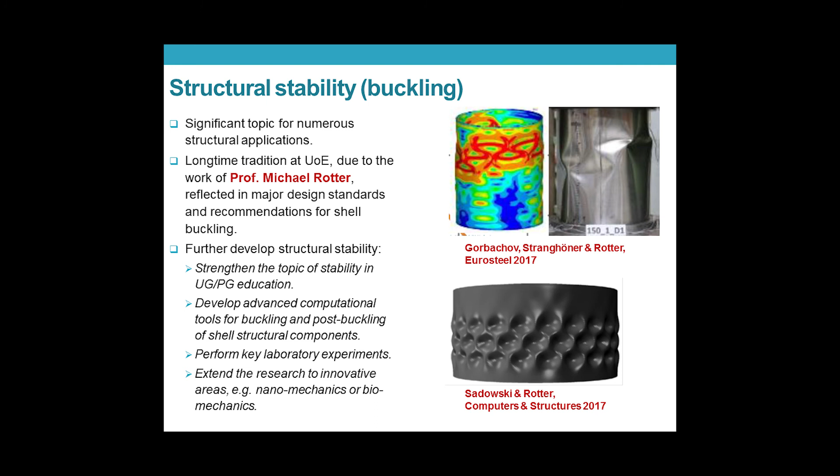So that's the most difficult part. And it's difficult because I have been working with many people, and it's difficult in one or two slides to put everybody there and thank everybody, but I'll try to present that in the most compact way that I can.

I'd like to thank my advisor, John Tassoulas. He was a person that taught me a lot, and his dedication to high quality research was very important for me.

Manolis Papadrakakis is a well-known person in structural engineering internationally in computational mechanics. He was my advisor in my diploma thesis in Athens and very supportive in all my professional steps. Dimitri Beskos in Patras, I met him at the age of 16, and he was the one that persuaded me to follow a civil engineering career and also make use of the structural engineering tradition of the family.